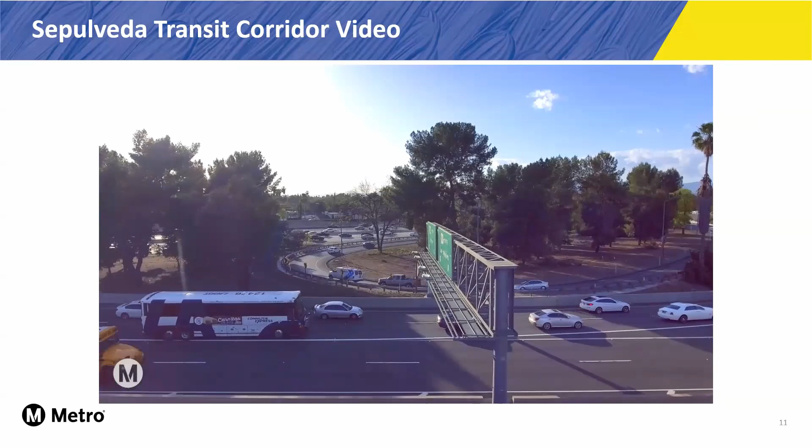Traveling between the valley and the west side isn't easy or fast, and traffic will only get worse over time. Metro has a plan to make it easier to get around. The natural barrier created by the Santa Monica Mountains makes this area complex and challenging, and will require innovation and multiple solutions. Metro is studying several projects in this area, including a new rail line with the Sepulveda Transit Corridor. The Sepulveda Transit Corridor project can provide reliable, high-capacity public transportation to provide an alternative to traffic and help take cars off the road. Before we get into the latest updates on this project, let's quickly catch up on our progress to date.

Metro completed a feasibility study in December 2019. The study looked at potential alternatives for traveling between the San Fernando Valley and LAX. In our extensive outreach for this study, we received more than 1,200 public comments. All of this public feedback and our technical analysis from the feasibility study has informed the range of proposed alternatives being advanced for environmental review.

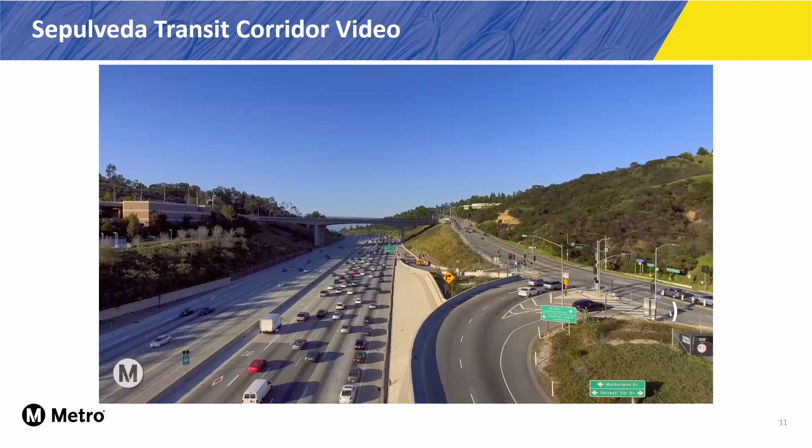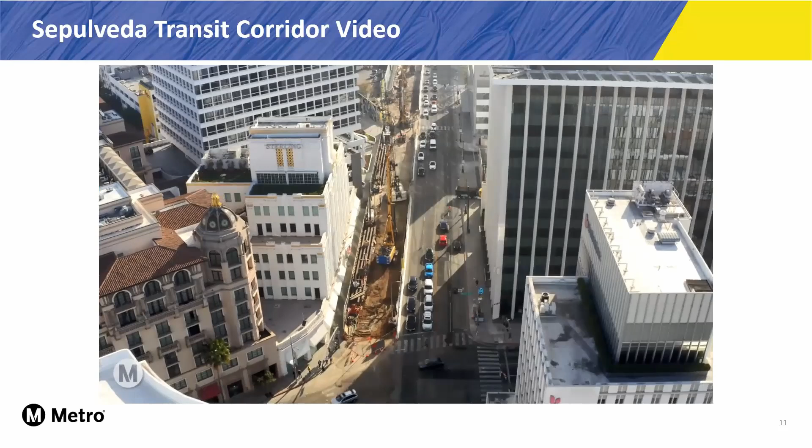In March 2021, the Metro Board approved pre-development agreements with LA Skyrail Express and Sepulveda Transit Corridor partners to pursue a potential public-private partnership to accelerate delivery of the Valley to West Side section of this project. The pre-development agreements, or PDAs, bring in teams that include designers, construction contractors, and financial partners to begin working with Metro earlier, when the project is still being planned, and long before we get into heavy construction activity. This early partnership can help to prepare designs that incorporate insights from construction and long-term operations and maintenance. This offers a life cycle approach to the project and prepares it for a possible public-private partnership.

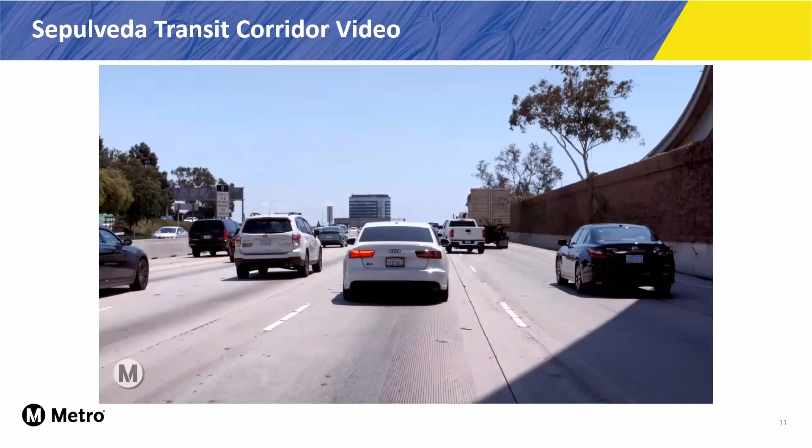The PDA teams worked with information from Metro's feasibility study to offer their proposed alternatives using proven rail technologies. We're now beginning environmental review. This is a formal, regulated process where Metro will study various aspects of each proposed alternative, including benefits, cost, feasibility, impacts, and any necessary mitigations. There are several points of community input during the multi-year environmental process. The Metro Board will select the locally preferred alternative, or final route and mode, for this project.

Let's look at the 6 alternatives we'll be studying in environmental review. They are identified with numbers. All alternatives begin at the Van Nuys Metrolink station, which will provide connections to Metrolink trains, as well as the future Metro East San Fernando Valley Light Rail, Metro G Line, formerly known as the Orange Line, and end on the west side at the Metro E Line, formerly known as the Expo Line.

Alternatives 1, 2, and 3 are monorail. Alternative 1 is fully aerial, traveling west before heading south along Sepulveda, with stops at the Metro G Line, Sepulveda Station, and Ventura Boulevard. Then it continues over the 405 through Sepulveda Pass with a stop at the Getty Center before continuing to the D Line Westwood VA station. It then heads south to a stop at Santa Monica Boulevard to end at the current E Line Sepulveda station. This alternative also includes an electric bus connection from the Westwood VA station to Veteran Avenue, Westwood Village, and the UCLA campus.

Alternative 2 follows the same route as Alternative 1, but with an automated people mover connection to the UCLA campus from the UCLA Westwood D Line station. An automated people mover is a small-scale, driverless transit mode similar to what you might see at an airport.

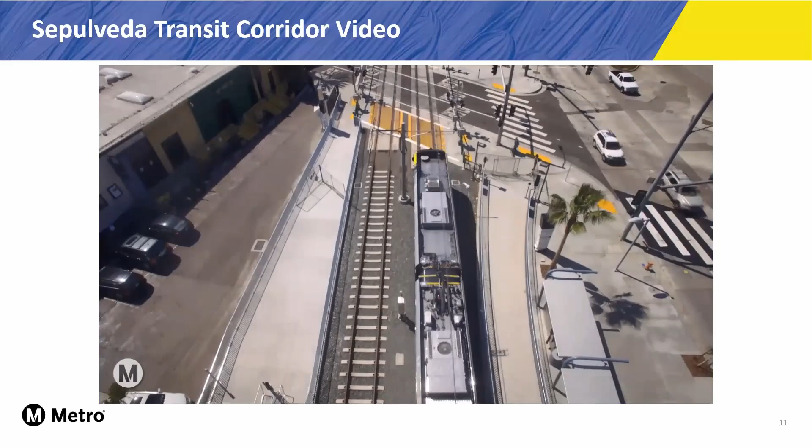Alternative 3 runs along the same aerial route through the Sepulveda Pass and goes underground after the Getty Center to provide an underground connection to the UCLA campus. From there, it connects to the UCLA Westwood D-Line station before returning to an aerial 405 route with a stop at Santa Monica Boulevard and ending at the E-Line Sepulveda station.

Alternatives 4, 5, and 6 are heavy rail. Alternative 4 has an aerial segment along Sepulveda Boulevard before moving underground after Ventura Boulevard, where it continues underground for the rest of the route. This alternative would have underground stations at the UCLA campus, Westwood UCLA D-Line station, Santa Monica Boulevard, and the E-Line Sepulveda station.

Alternative 5 begins aerial at the Metrolink Van Nuys station and then moves underground along Sepulveda Boulevard for the rest of the route. It heads along Sepulveda with underground stations at Sherman Way, the Metro G-Line Sepulveda station, Ventura Boulevard, UCLA, the Westwood UCLA D-Line station, and Santa Monica Boulevard before ending at the E-Line Sepulveda station.

Alternative 6 is entirely underground. From Van Nuys Station, it heads south under Van Nuys Boulevard, stopping at the G-Line Van Nuys Station and Ventura Boulevard. From there, it continues with stops at the UCLA campus, Westwood UCLA D-Line station, and Santa Monica Boulevard, before turning west to end at the E-Line Bundy station.

We're now entering scoping, which is the first step in the environmental review process. During this stage, we want to hear from you about what Metro should consider and study as we prepare the environmental impact report for the Sepulveda Transit Corridor. Possible comments might include input on the destinations that you think are important to serve, your preferences for transit in this area, and questions or concerns you might have about project impacts.

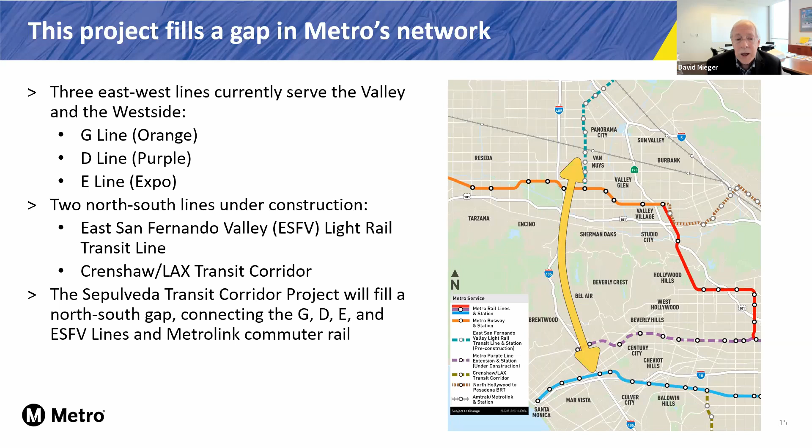Wanted to talk a little bit about the Sepulveda Pass. We completed a widening project a few years back along the 405 freeway, where we widened the lanes to full standard 12-foot lanes. We improved the shoulders and many of the on and off ramps to the freeway in order to improve the capacity and safety along the 405.

Although, as many of you know, the demand for this route through the mountains is so severe that building more traffic lanes is just not going to happen, or is very constrained within the canyons going through the Sepulveda Pass. So we really have to look for other options to get through the pass.

In addition to this project, we also have several other initiatives underway, parallel studies going on at the same time. I mentioned the D Line, the Purple Line, which is under construction. We also have a Sepulveda Pass Express Lanes project, and we had some scoping meetings for that project a couple of months back.

We're basically looking at express lanes such as we have on the 10 freeway and the 110 freeway right now, where in areas of severe congestion, people paying a variable fare based on congestion can actually travel upwards of 45 miles an hour through the pass even during peak rush hour.

We're looking at opportunities to do that in the Sepulveda Pass, in the median area of the freeway. Outside of the Sepulveda Pass area, we have a 405 comprehensive multimodal corridor plan, which goes all the way up to the North Valley where it joins the 5, continuing through the valley, through the pass, through the west side, and the South Bay curve, looking at a comprehensive way of enabling better flow along the 405.

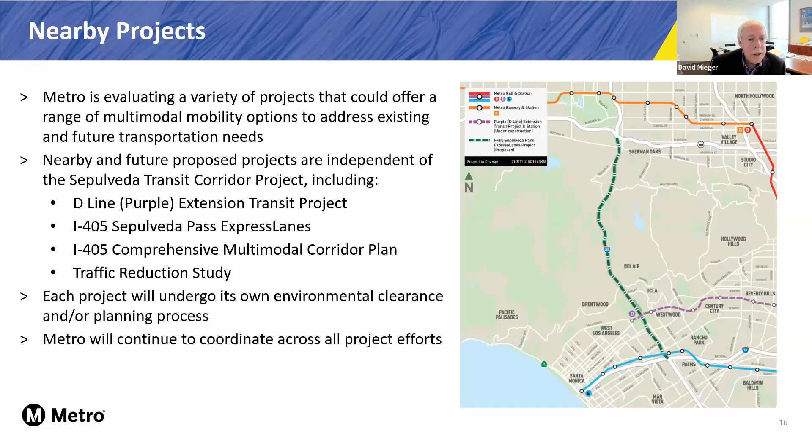Next slide. This is a little bit of background on how we got here. Peter mentioned it in the video, but Measure M was really the benefactor for this project. We had 71% approval of that plan countywide, which included several projects we are currently developing in the San Fernando Valley and West Side area.

The study we did in 2017 to 2019 tried to look at a broad range of alternatives through the Sepulveda Pass corridor, both below ground and above ground. At that time, 3 heavy rail alternatives and 1 monorail alternative were identified for further study to be carried forward.

With the results of that study, we put out pre-development agreement solicitations to the private sector to attract firms with extensive experience in building, owning, and operating these types of transit lines, to get their experience early on. Normally we wouldn't bring in a contractor until the end of the environmental process, but this is an effort to bring them in at the very beginning so they're on board.

Today they've been under contract since August to proceed and help us identify and refine these alternatives through the environmental process. By no means are these 6 alternatives fixed in stone today — they're initial proposals from these firms. Our goal through the environmental process is to refine them, narrow them down, and ultimately get to a single project that has the most community support and a firm commitment from a team with extensive experience developing these types of projects.

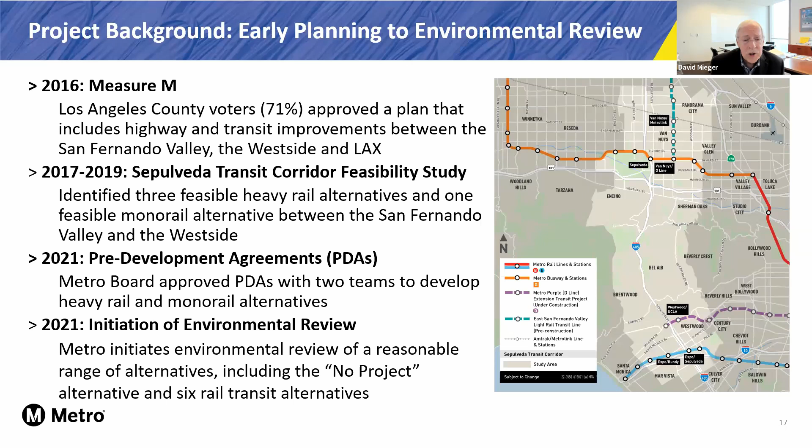So with that, I would like to turn it over to Kavita Mehta to talk a little bit about the PDA teams and the process going forward.

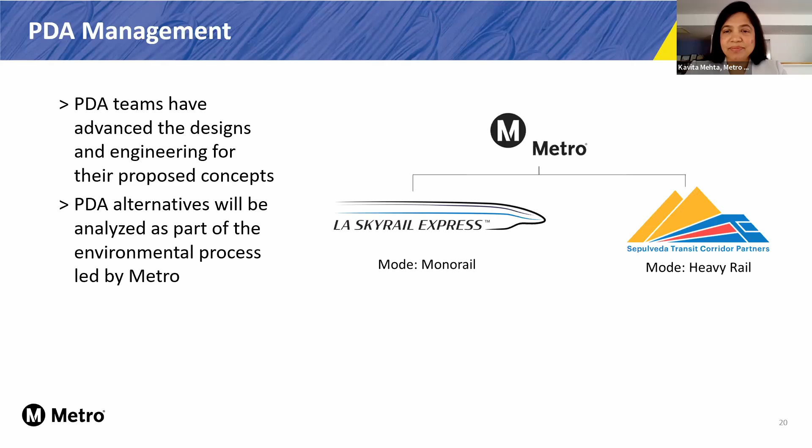And with that, I will hand it over to Jackie. Thanks, Kavita. Hi everyone, I'm Jackie Su, Senior Transportation Planner with Metro Planning.

As we think about project goals and objectives, let's talk about current transit service. The Sepulveda corridor provides an essential transportation link between the San Fernando Valley and the West Side. Over 400,000 people travel the corridor each weekday, but less than 2% do so by transit.

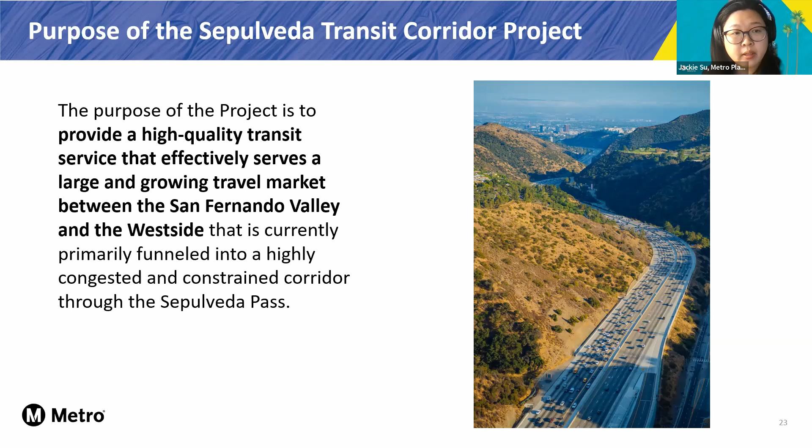This leads us into a discussion of the purpose of the project. The purpose of the Sepulveda Transit Corridor project is to provide a high-quality transit service that effectively serves a large and growing travel market between the San Fernando Valley and the West Side.

The project goals and objectives will help guide the environmental process and identify the merits and challenges of each alternative. These goals and objectives might look familiar because they're informed by the goals and objectives from the feasibility study. Since that early planning study, we have updated these goals based on the work of the feasibility study and associated outreach, and we have also updated the goals to further emphasize equity and sustainability. The project has 6 goals.

The first of these goals is to improve mobility, which means increasing transit frequency, decreasing travel time between the Valley and the West Side, increasing transit ridership, prioritizing connections to local points of interest and destinations, promoting efficiency of transfer experience between transit lines, and supporting non-automobile first/last mile connections, which means walking, riding, or rolling to and from a station.

The second goal is to improve accessibility and promote equity. This means improving access for equity-focused communities, which are communities in which a percentage of residents are low income, people of color, and have no access to a vehicle. This goal also emphasizes identifying and pursuing investments that serve those with the greatest mobility needs.

The third goal is to provide a cost-effective solution and to minimize risk, maximizing benefits to the public relative to cost, and maximizing potential eligibility for state and federal funding opportunities.

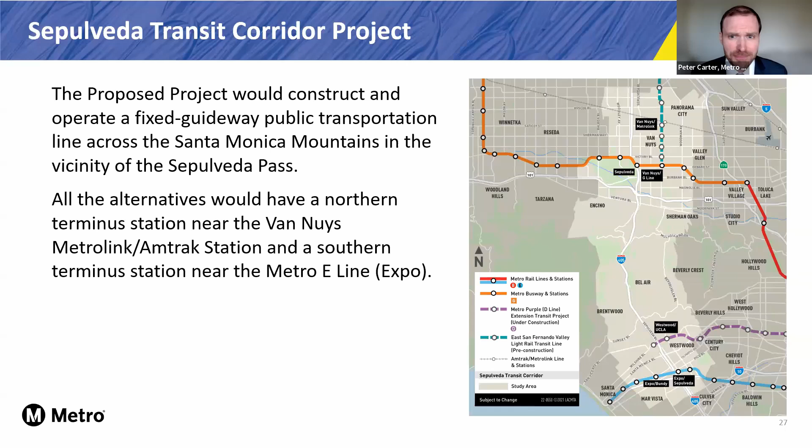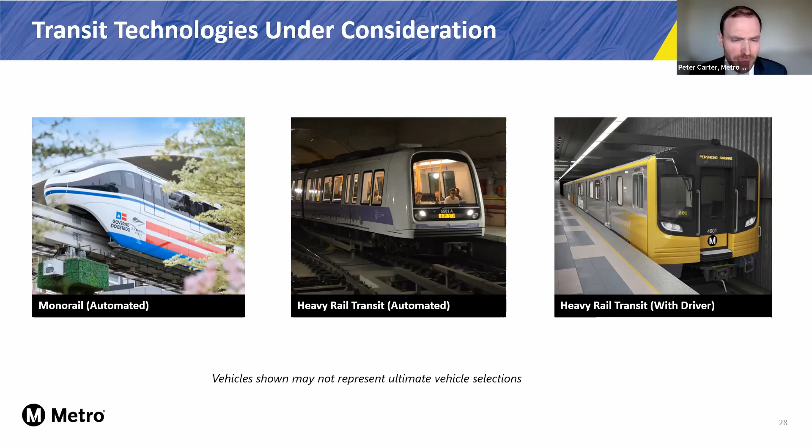There are three different transit technologies under consideration: an automated monorail, an automated heavy rail, and a driver-operated heavy rail. These different technologies accommodate different numbers of passengers in their train cars, have different numbers of train cars in their train sets, and operate during peak periods at different frequencies, but all of these technologies have sufficient capacity to meet the needs of the project.

The next six slides will take us through the six alternatives currently proposed for environmental review. Alternative 1 is the first monorail alternative. All of the monorail alternatives are in an aerial alignment within the 405 corridor. The differentiating feature of alternative 1 is a bus connection to UCLA. The monorail alignment length is 15.3 miles.

There are 8 stations associated with this alternative, which starting from the south include a connection to the Metro E line, a station at Santa Monica Boulevard, a connection to the Metro D line, stations at the Getty Center and the 101, a connection to the Metro G line, and stations at Sherman Way and the Van Nuys Metrolink station. The bus connection to UCLA connects to the Metro D line, formerly known as the Purple Line, at the Westwood VA station. In order to operate any of these alternatives, the project will require a maintenance and storage facility site.

These are places where the vehicles are kept in good repair and stored when not in use. The maintenance and storage facility site for the monorail associated with this alternative is located above the Metro G line Sepulveda station parking lot, and the maintenance and storage facility site for the electric bus associated with this alternative would be co-located at the same location alongside the UCLA BruinBus facility.

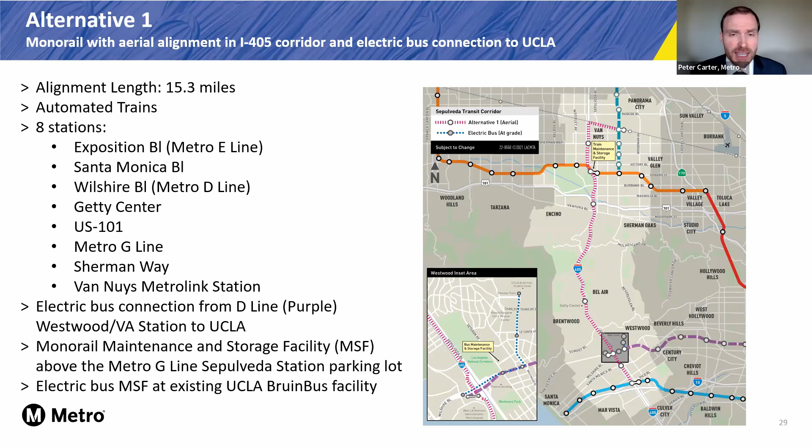Alternative 2 is the second monorail alternative, and a differentiating feature of this alternative is a connection to UCLA using an aerial automated people mover. The monorail portion of the alignment is 15.8 miles in length, and it has the same 8 stations as alternative 1. If you look at the small inset map, the monorail alignment comes out of the 405 corridor to get to Veteran Avenue, and it's at Veteran Avenue and Wilshire Boulevard that the monorail connects to the automated people mover, connecting passengers to UCLA.

The maintenance and storage facility site for the monorail for this alternative is in the same location as alternative 1, and the maintenance and storage facility site for the automated people mover is located above the UCLA BruinBus facility.

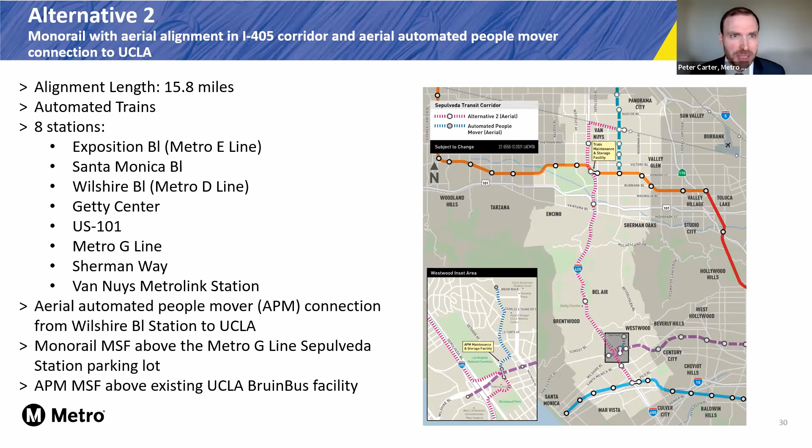Alternative 3 is the third monorail alternative, and the differentiating feature of this alternative is an underground connection to the UCLA campus. The alignment length is 16.2 miles, and that additional station is a station at the UCLA campus. The underground alignment extends from just south of the Getty Center to just north of Wilshire Boulevard, and the maintenance and storage facility site is in the same location as alternatives 1 and 2.

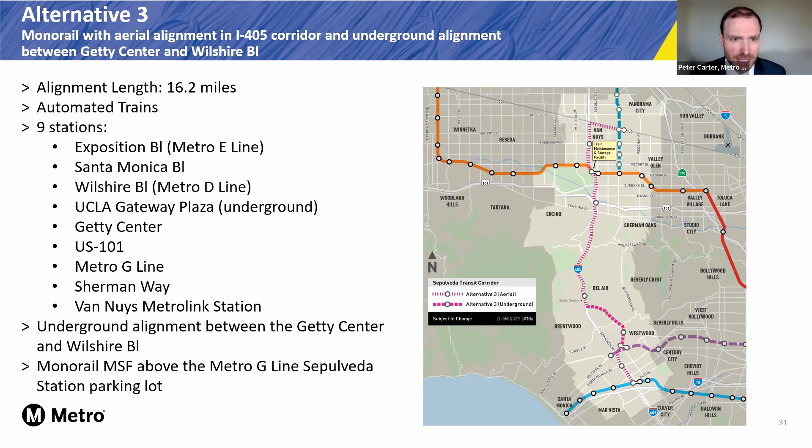Alternative 4 is the first of 3 heavy rail alternatives. The differentiating feature of this alternative is an aerial alignment along Sepulveda Boulevard in the valley. The alignment length is 14 miles and includes 8 stations, beginning from the south with 4 underground stations, a connection to the Metro E line, a station at Santa Monica Boulevard, a connection to the Metro D line, and a station at UCLA. Then on the other side of the Santa Monica Mountains, 4 aerial stations: one at Ventura Boulevard, one at Metro G line, Sherman Way, and the Van Nuys Metrolink station.

The maintenance and storage facility site for Alternative 4 will be located just to the west of Woodman Avenue and south of the Metrolink Ventura County Line Railroad tracks. Next slide.

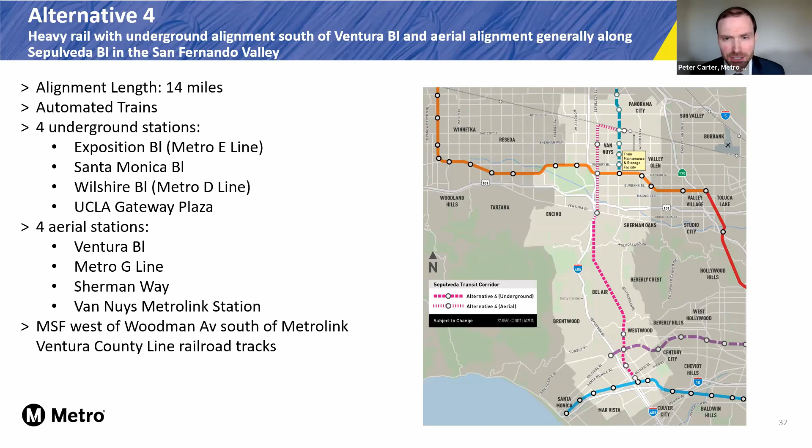Alternative 5 is our second heavy rail alternative, with the differentiating feature of an underground alignment along Sepulveda Boulevard in the valley. It has the same 8 stations as Alternative 4, with the difference that all of those stations are underground except for the connection to the Van Nuys Metrolink station. The maintenance and storage facility site for this alternative would be in the same location as Alternative 4.

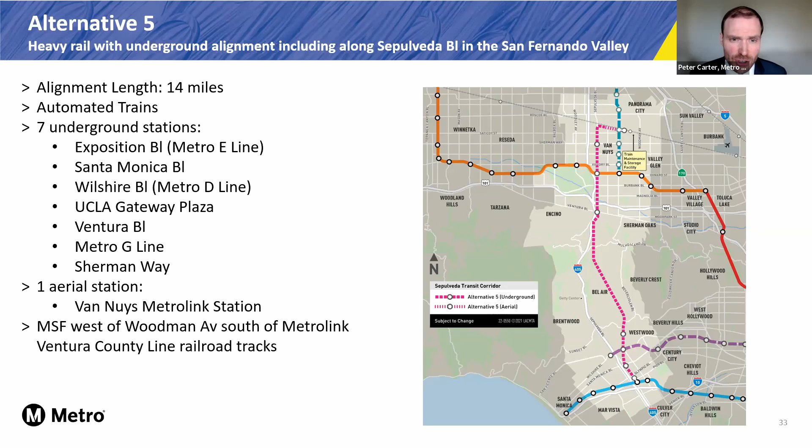Finally, Alternative 6 is the third heavy rail alternative. The differentiating feature of this alternative is an underground alignment along Van Nuys Boulevard in the valley. The alignment is 12.6 miles in length, and it includes 7 stations: a connection to the Metro E line at the Bundy station, a station at Santa Monica Boulevard, a connection to the Metro D line, a station at UCLA, Ventura Boulevard with a connection to the Metro G line, and a connection to the Van Nuys Metrolink station.

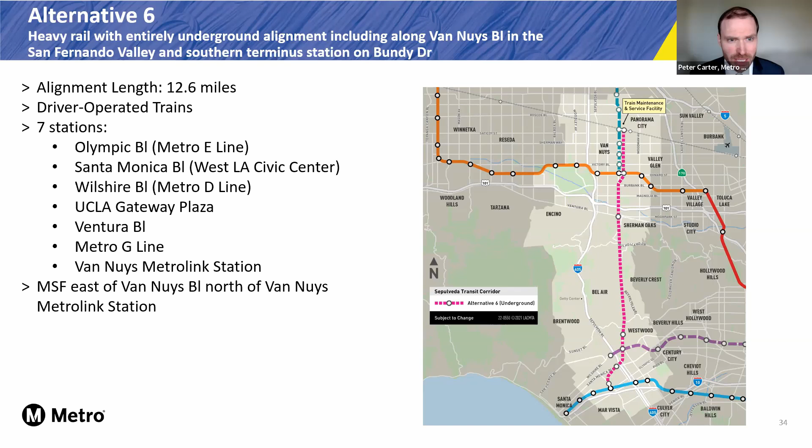The maintenance and storage facility site for Alternative 6 would be just east of Van Nuys Boulevard and north of the Van Nuys Metrolink station railroad tracks. Next slide, please.

We'll also be looking at a no project alternative as part of our environmental review. A no project alternative means a scenario in which all existing highway and transit services and facilities are considered, as well as near future transit and highway projects, with the exception of this one, the Sepulveda Transit Corridor project. Next slide, please.

For example, the report will include a summary evaluation of the alternatives, including construction costs, right-of-way costs, and annual operating costs, as well as benefits associated with the project, such as ridership, reduction in automobile miles traveled, and increased mobility for equity-focused communities resulting from the project.

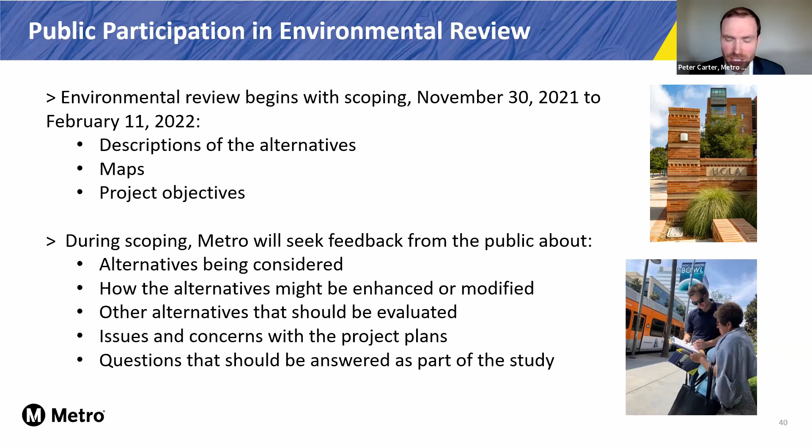The meeting that we're having today is a scoping meeting, and the purpose of today's meeting is to provide more information about the alternatives, as well as to receive your verbal comments if you have them, although there are many other opportunities and ways that you can provide those comments. We're looking for your feedback on refinements to the alternatives that we should be considering, as well as any environmental questions that you'd like to see answered as part of this study. And with that, I will thank you again for your engagement and your participation in today's meeting and turn things back over to Karen Swift.